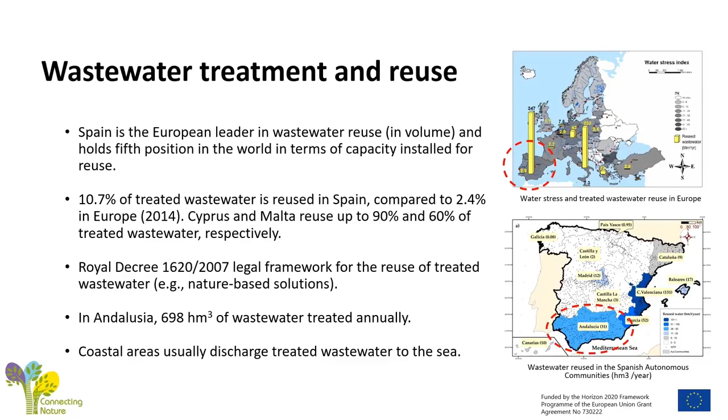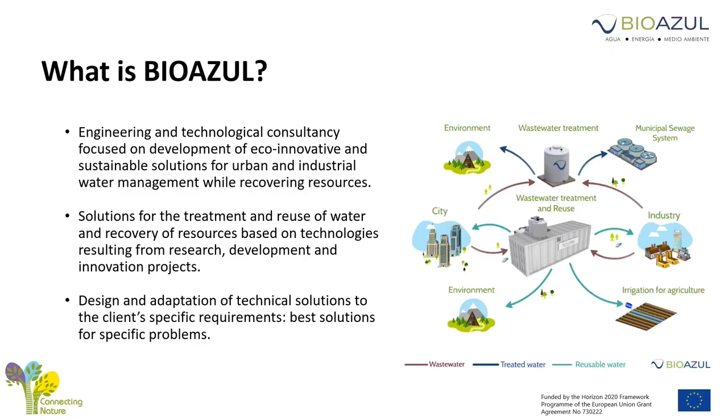So what is BioAzul doing, and how does it contribute to achieving those strategic lines I mentioned before? BioAzul is an engineering and technological consultancy mainly focused on the development of eco-innovative and sustainable solutions for urban and industrial water management, especially treatment and reuse, while recovering resources by applying circular economy principles. We offer tailored solutions for wastewater treatment and reuse based on technologies resulting from research, development, and innovation projects. One aspect that differentiates our level of competence is our capacity to design and adapt technical solutions to each client's requirements, always providing the best solution for a specific problem.

This is one of our technical solutions, the RichWater technology, developed in the frame of a European project. This technical solution was implemented to treat and reuse wastewater from a small municipality located in Malaga, and it consists of an integrated system of water treatment and irrigation module, which can provide 150 cubic meters of treated wastewater per day. We mainly have experience in the agricultural use of the effluent, irrigating subtropical crops in this project, but other uses could be considered, contributing to the implementation and maintenance of nature-based solutions like green areas, urban forests, or community gardens. This technical solution provides a high-quality effluent that meets regulatory standards, as certified last year with the European Environmental Technology Verification.

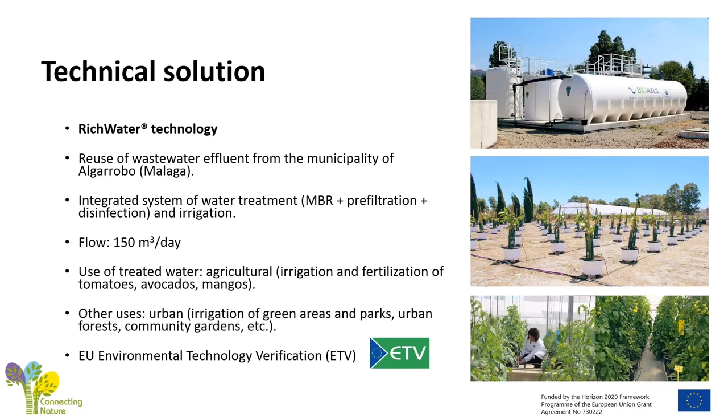To conclude, I would like to highlight the importance of designing solutions considering the local context and needs. In this scenario, there is a strong market demand for subtropical products, but at the same time, production is clearly limited by the lack of water for farmers to cultivate such crops. A common vision of all the actors involved is crucial and must include municipalities, irrigation communities and farmers, local action groups, private companies, and research organizations.

In fact, the high commitment from these local actors has translated into the creation of an operational group as one of the initiatives from the European Innovation Partnership for Agriculture, in order to continue with this innovative solution. RichWater was also selected by the Water Europe platform as a water-oriented living lab, acting as an instrument to bring research and innovation to the community and the agricultural sector, and therefore helping the local economy. All these efforts were recognized last year by the provincial government, and BioAzul and the RichWater solution was awarded in the category of Best SME Contributing to Climate Change Adaptation in Malaga.

Hi everyone, my name is Jonathan Müller from Helix Pflanzen in Germany. I'm very delighted to be speaking to you today on problem solving with green infrastructure, nature-based urban heat island mitigation ideas from Germany. I'm an architect and now the managing director of the company Helix Pflanzensysteme. We focus on planning and implementing functional nature-based solutions, mostly in urban environments with a clear focus on vertical green walls and gardens.

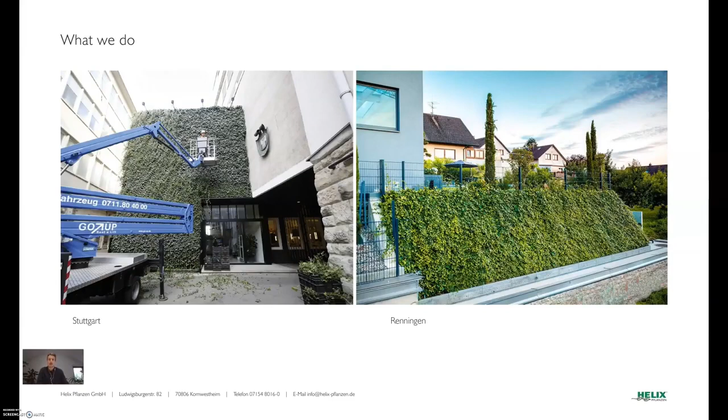Our background is producing plants. I'm the 4th generation owner, and we've been producing millions of plants every year in 3 locations in Germany. Over the last 10 years, roughly, we've been focusing more on vertical greenery in urban spaces, whether it's bigger structures like parking garages or small interventions on squares. We pretty much have a solution for all sorts of problems in the urban context. We do a lot of maintenance, planning, and taking care of plants. Just recently we've launched a green tram station, or bus station, as well as renting out mobile green installations to communities all over the place.

The reason why I want to speak to you today is because, as an architect, I focus mostly on urban areas and what kind of stress is being caused to them. We all know that in a very gray and concrete city, there's a lack of rainwater retention.

There's poor air quality because of cars and other engines. There's a lack of cooling, shading, evaporation, and so on.

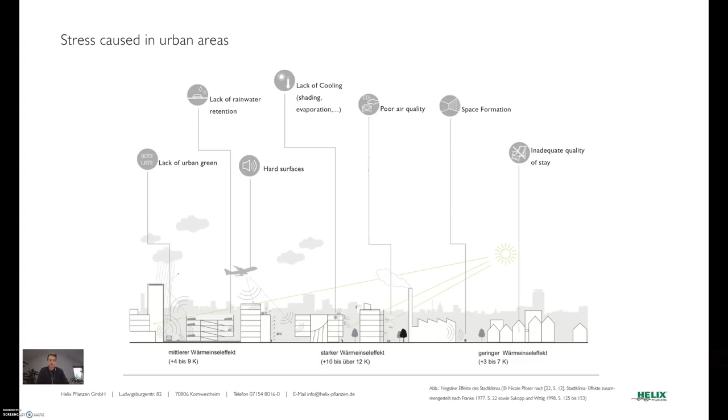One solution for these issues that we're facing every day in urban areas is through nature-based solutions. The European Commission defines nature-based solutions as solutions to societal challenges that are inspired and supported by nature, which are cost-effective and provide environmental, social, and economic benefits to help build resilience.

Our products are nature-based solutions, and in combination with gray infrastructure, there's a hybrid system that we call green infrastructure, that improves resilience to climate impacts.

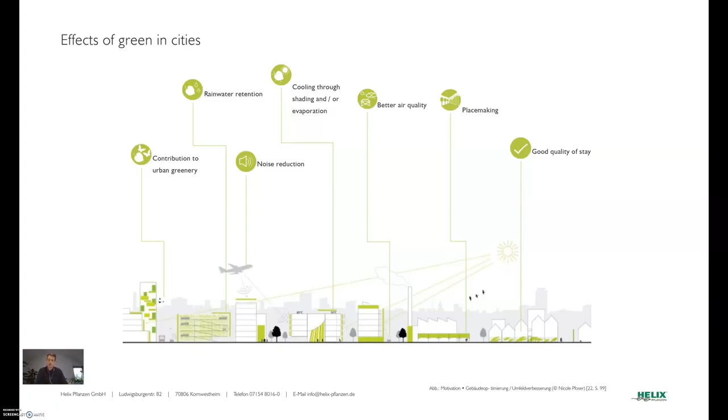So if we look at what green can do to urban spaces: it will improve air quality because plants have the availability to do so. Green spaces work as noise reduction, as they don't give back echo of sounds as easily as concrete spaces. And rainwater can be collected and be used and evaporated through green systems. So there's a lot of good things that can work in improving urban areas.

And that's kind of why I'm here today. I want to maybe inspire you to solve problems through green infrastructure by telling you 3 stories that we've experienced, to give you an inside look into our planning processes and how we go about in these kind of products.

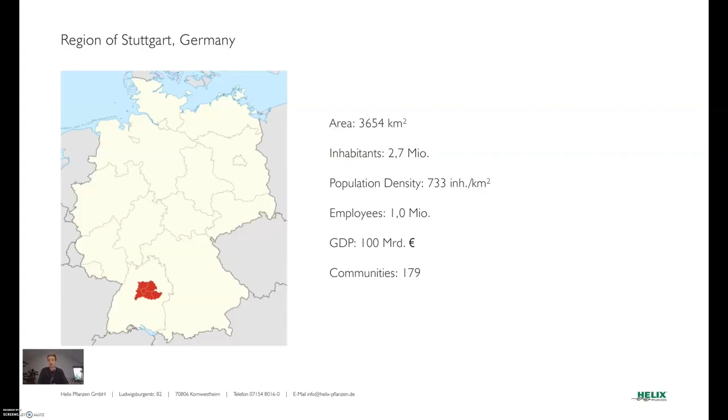I do want to start with the Green Living Room in Ludwigsburg, Germany. A few years back, we were part of an EU-funded research program called TURAS, and the region of Stuttgart in South Germany, where we're located as well, set out a call saying, we have 180 communities in our region. Is there anybody who wants to join this project where we can try and actually build a green wall to figure out all these positive effects of nature-based solutions?

Because the region of Stuttgart today is already having increasingly a lot of days of thermal stress, and it's been predicted that in 50 years or so, this number will keep on constantly rising. So we have to start right now to set an example of what green infrastructure can bring to cities.

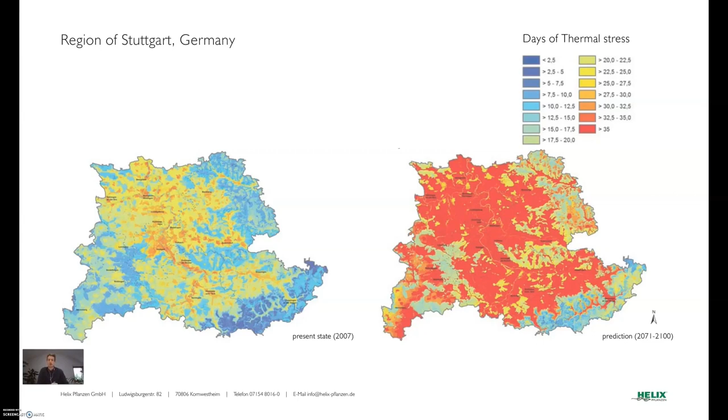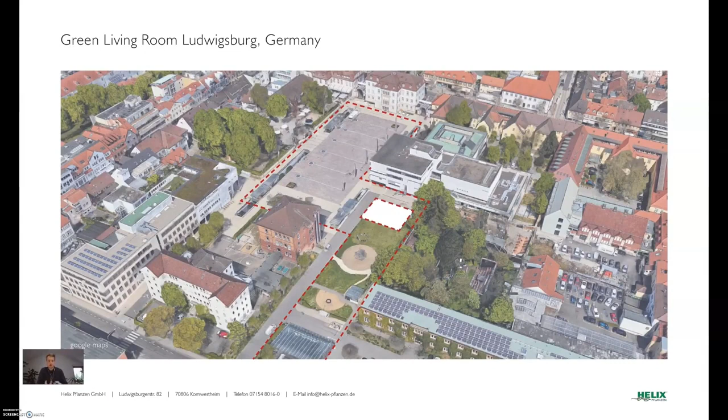The city of Ludwigsburg said, this sounds very interesting. We have this parking garage, an underground parking space where we cannot plant any trees on top of. Is there any way you could use this rather tiny square to do this green intervention, this nature-based solution? With the help of an architect, Ferdinand Ludwig, we went about designing sort of a green space, what we now call the green living room.

We always knew what kind of attributes this green living room should have. It should become a social meeting point for the people of Ludwigsburg. It should provide shading because it's a very hot square where nobody wants to spend time, and through shading, people can experience cooling. Obviously, it should be a habitat for animals and plants, and function as a water reservoir.

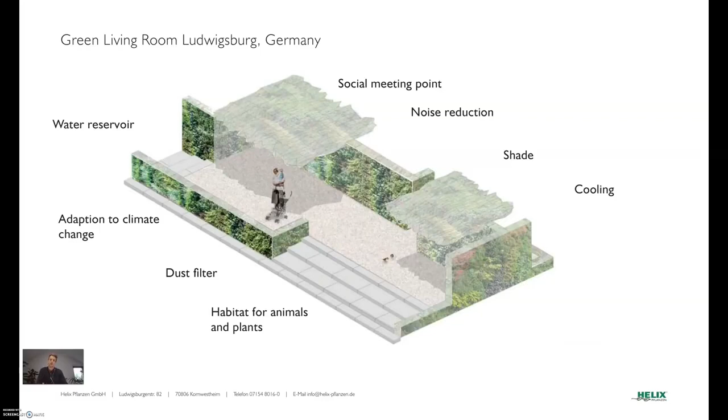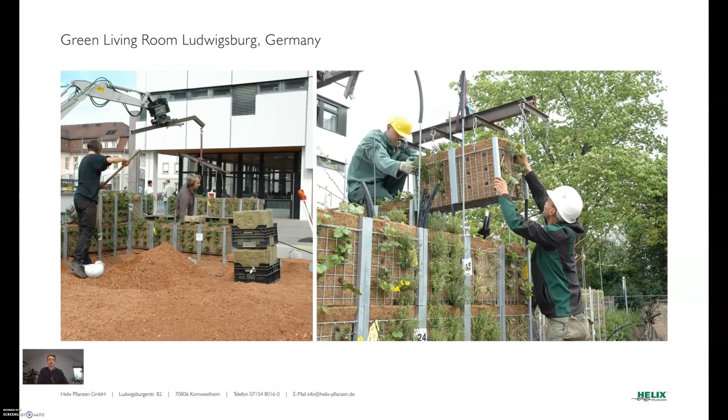After planning, we went on building. We have this product where we can pre-plant plants and then stack them on top of each other, just like a Lego brick system. And it's absolutely brilliant. It's been 5 years being there, and every year it gets bigger and bigger.

The city of Ludwigsburg even puts out these chairs in the summer every morning, and at the end of the day, they always collect them in the green living room because that's where people want to sit. They don't want to sit on a hot square in summer. They want to sit in the green spaces, in the cool, shady areas.

So this project has been a brilliant example of how to design with nature-based solutions. We've put around 7,000 plants into these walls and roofs, and all that, on top of this parking garage where you weren't able to build any trees. 140 square meters of green space has been brought back.

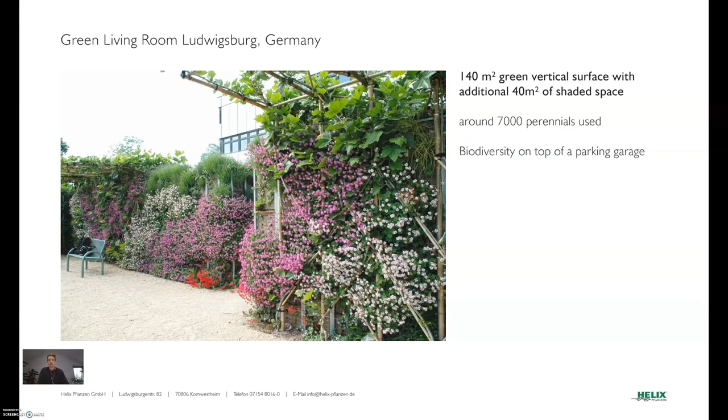And so we kind of figured it's a brilliant story to bring about. Because the research project was coming to an end, and there was a bit of budget left to do some more with it, and because the idea was so good, we thought, how can we make this green living room in Ludwigsburg mobile, flexible, to bring to all the partner cities so they can have the same positive experience from it as we did in the city of Ludwigsburg.

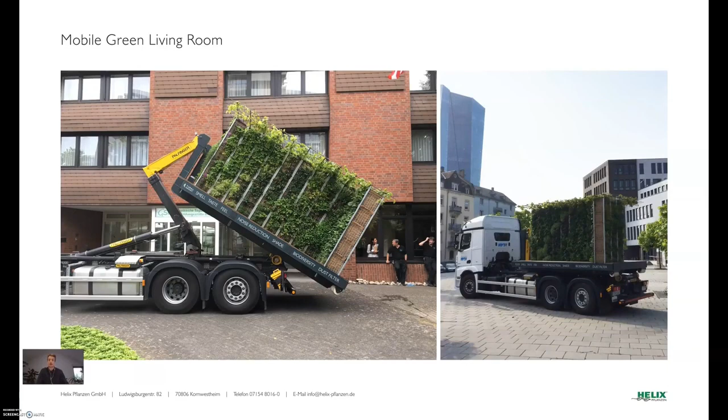As weird as the idea sounds, we thought, how can we put this on a truck and ship it out to a place? We went back into designing. That's pretty much what happened in 2016. We've come up with the mobile green living room. You could easily load it up on a truck and then ship it out to all sorts of places. And we've been doing that ever since.

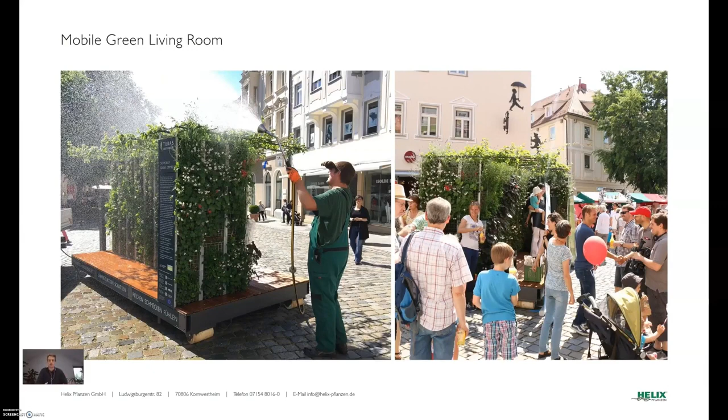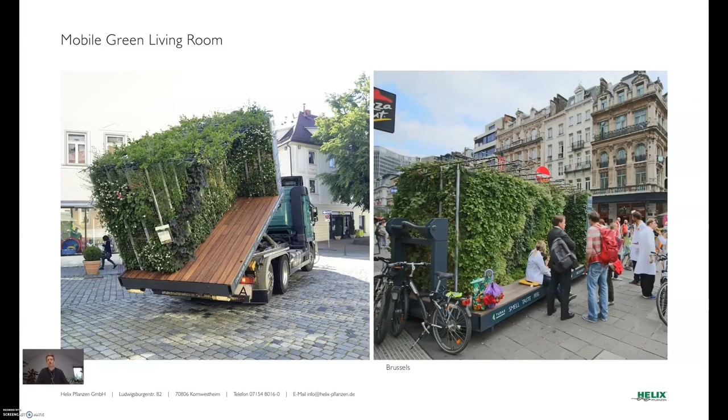We've now built over 20 of these mobile green living rooms, and they are being rented out to cities so they can use them for any sort of events or just to promote a climate adaptation change program, or whatever they want to transport on it. It's a very easy tool for cities because you just set it up. You don't need to build something actually. This is meant as a great starting point to have a conversation about green infrastructure in cities because people can experience it.

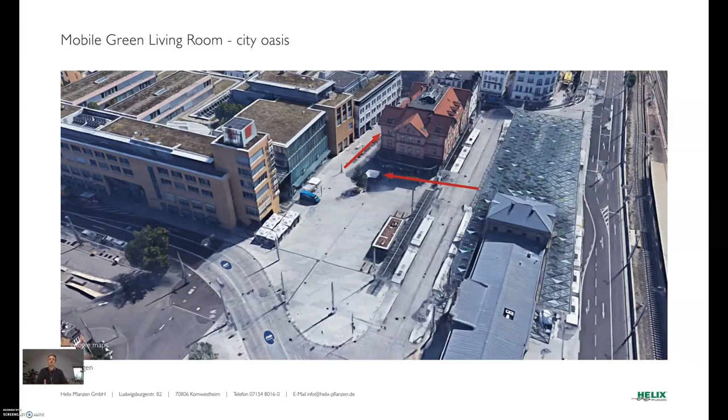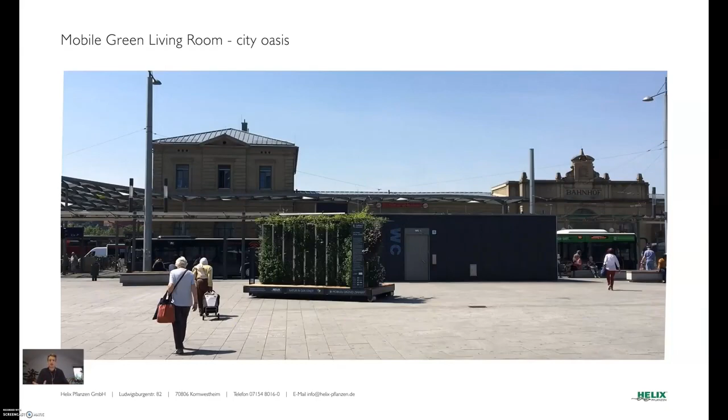Once we put the mobile green living room there, I said, this is not it. It looks desperately alone there. Nobody still uses it. So being an architect, I went back into the planning process, thinking this should get bigger in some way.

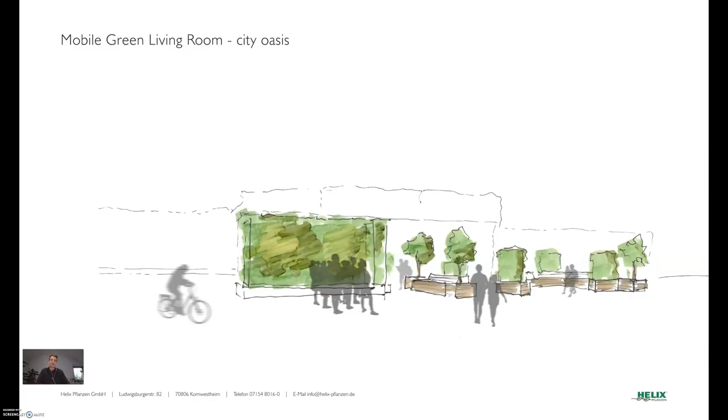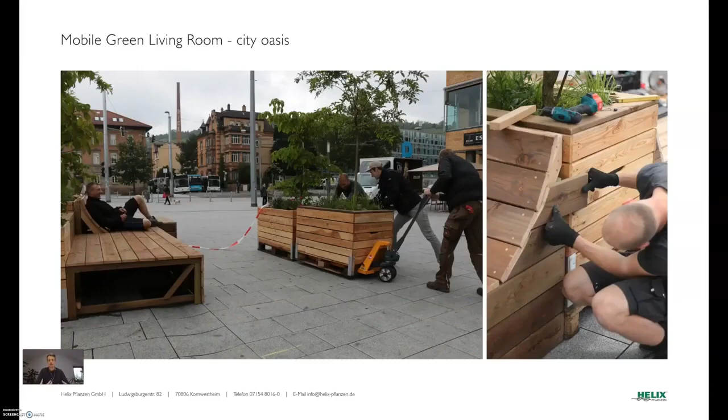We thought of the picture of an oasis where people have more space, green space to spend time. We designed more sitting, more plants. We built those two years ago and shipped it out to the city of Esslingen, where it's very easy to set up, very temporary. And that actually worked. A square where nobody wanted to spend time ended up being a square where whenever I went there, 20, 30 people were sitting on these benches and in the green spaces.

We designed it in a very easy way because we figured it's just about 5 different modules that you can combine in any sort of way. We talked to our clients saying, use these elements and build your own oasis. It doesn't have to be something we design, but use these nature-based solutions for any sort of square because you know best what you need at that occasion.

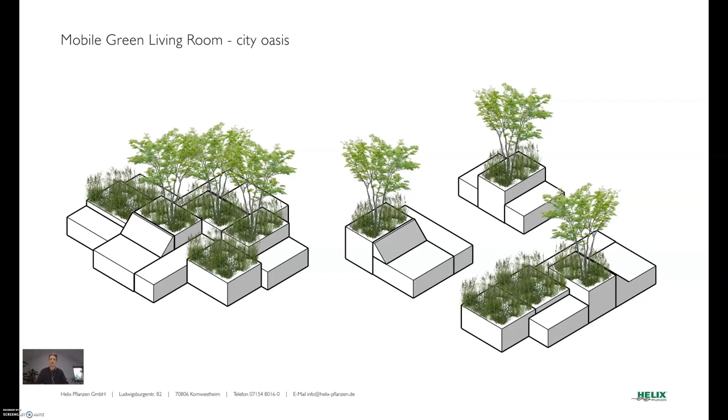And that's what we do. We even send out little models. Obviously COVID kind of stopped us for a bit because spaces where people meet weren't as popular in the last year. But that will change because climate change didn't stop because of COVID, and so people want to spend more time outdoors in green spaces. So we're excited where this will take us in further steps.

The third, maybe inspiring story I want to tell you focuses on living green walls. We had a customer in Reutlingen. They said, we have this very busy street and we want to shut a space in between two buildings as a noise barrier wall so nobody behind is affected by the noise coming from the street.

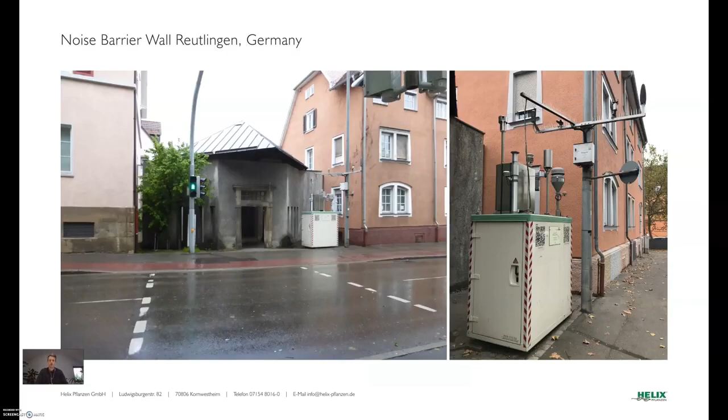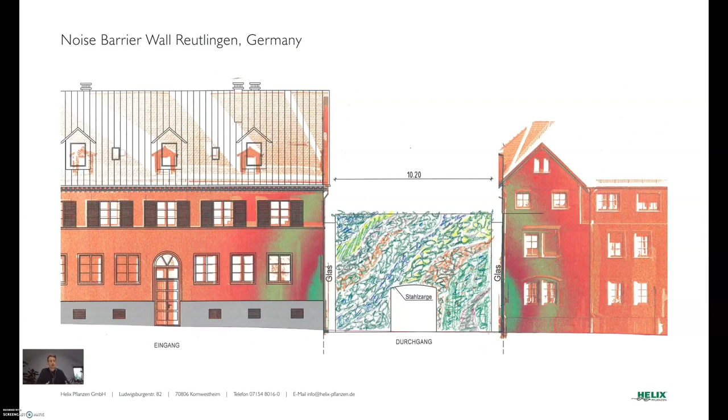The city even set up a measuring station for air quality and noise and all sorts of stuff you can measure right in front of this horribly old structure that was meant to be a walkway through a barrier wall. So the city of Reutlingen tore it down. They gave us the idea: what can we design in between those buildings that functions as a noise barrier wall, but will improve the quality of air and space through plants.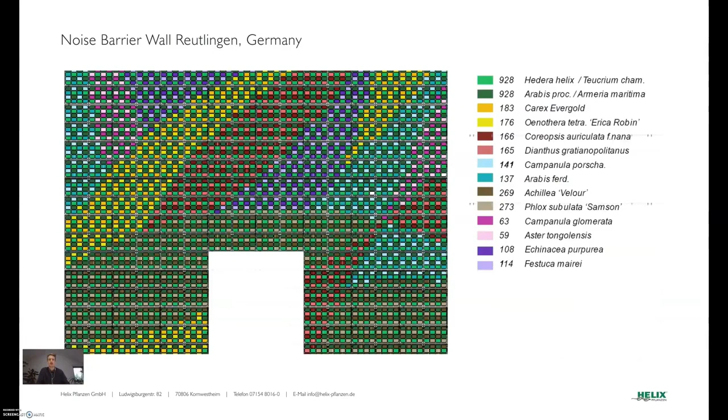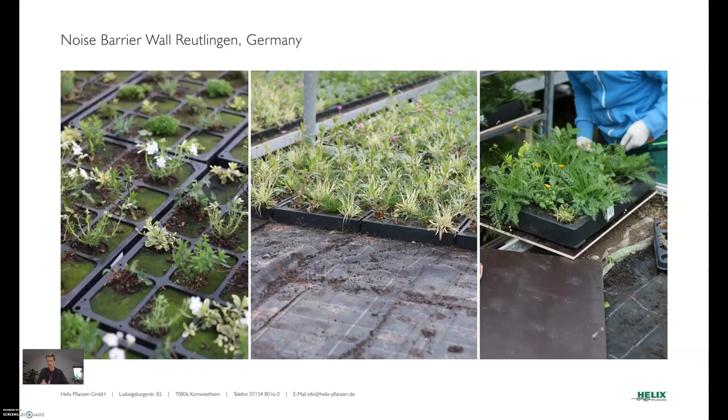We figured out what kind of plants we could use at this occasion, came up with a selection, translated the first sketches of the architect into a planning, a green planning, and we have a system for vertical green walls, which you saw in the plant in our nurseries. We let them grow there, and after 2 months, we took them out of our nurseries and brought them to site on these trolleys.

We put plants on both sides of these walls, and eventually this will improve the air quality on site, which is fantastic. So what I'm trying to pass on to you today is that using green, you can achieve quite something in a very positive manner, because everybody likes green.

To leave you with a few thoughts of mine on how to implement these nature-based solutions successfully, because we've been going through these kinds of processes and stories that you've just heard quite a few times.

Obviously, a lot of planning is involved. I'm an architect, so this is what I do most of my day, planning these systems and what kind of system will work in different sites. It needs a lot of conversations with clients, with local authorities, with people at site. Financing is definitely a big part of it, because nature-based solutions do still cost money, although the value that comes from it sometimes cannot even be matched.